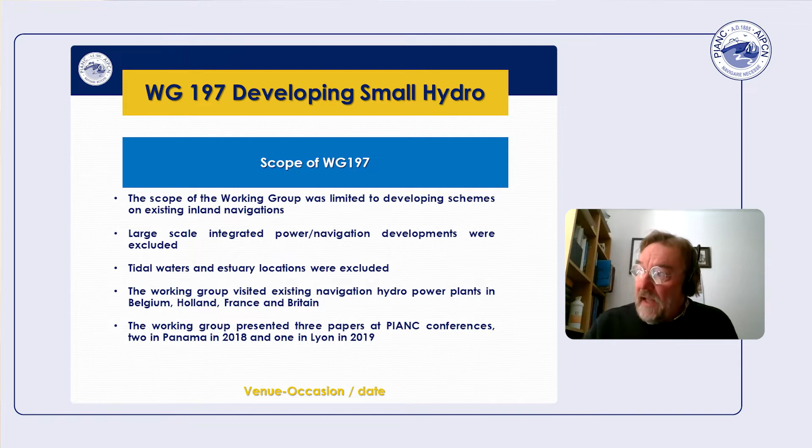The scope of WG197 was fairly tightly drawn in the initial terms of reference. We were limited to developing hydropower on existing navigations. Large-scale schemes were excluded from our work. We were also excluded from tidal waters and estuary waters. During the work of the group, we visited existing navigation hydropower plants in Belgium, Holland, France, and Britain. The working group presented a total of 3 papers: 2 in Panama in 2018 and 1 in Lyon in 2019.

So the program for this webinar today: we're going to have 3 short presentations, which will take about 15 minutes each, from 3 of the members of WG197. We're going to present the highlights of the guide on some of the most important areas, hopefully whetting your appetite to go and read the guide and take some more information from it.

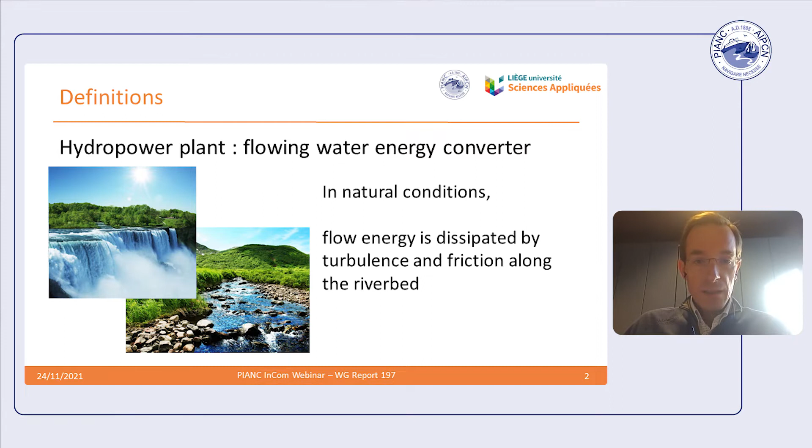And I will speak to you about site identification and energy production potential, as Nick already mentioned. So first, a few definitions. What is a hydropower plant in general? It is a converter of flowing water energy. In natural conditions, flow energy is dissipated in a river through turbulence and friction along the riverbed. In a hydropower plant, we convert this flow energy to something else: first into mechanical energy with a turbine, and then into electricity with a generator.

So if you want to build or set up a hydropower plant, first we need to assess how much energy we can convert from the flow. We need to find a place where we have enough energy to convert.

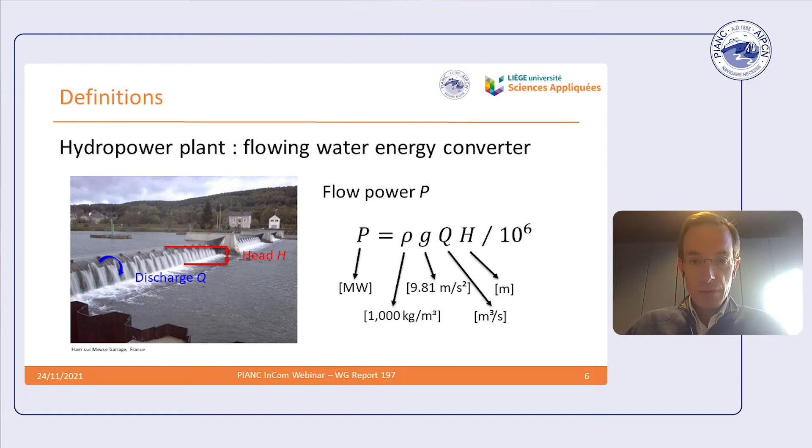So let's have a look at the picture on the screen. What do we need to produce electricity from flow energy? We need a water level difference, what we call a head, H. And we need water going through this head, so we need a discharge. As far as you have a head somewhere and a discharge through this head, you have a flow power, which is dissipated by the flow. This flow power is simply the product of the discharge times the head, and a few constants: water density and gravity acceleration.

And as far as this head and this discharge are available over time, you have energy which is dissipated, and the amount of energy is simply the product of the power times the time the power is available. So for instance, if you have a 10 cubic meter per second discharge somewhere crossing a head of 4 meters, you have a power which is dissipated by the flow of 400 kilowatts. And if your discharge and your head remain constant for 1 hour, for instance, the amount of energy dissipated is 400 kilowatt hours.

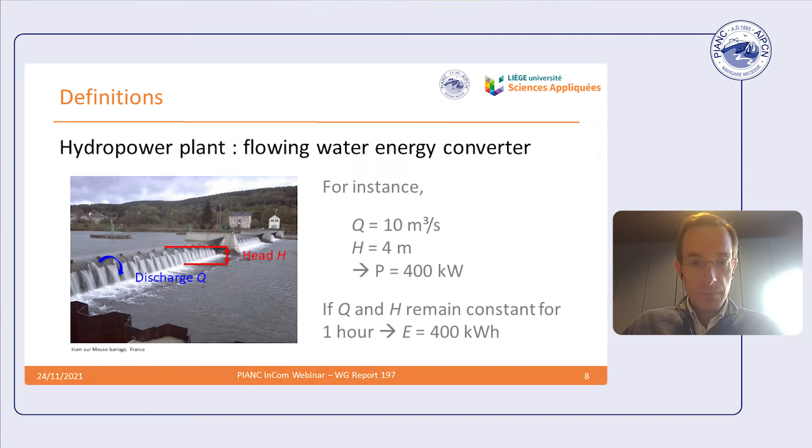With a power plant, you build something to convert flow energy into electricity. Typical schemes today for small hydropower systems have an efficiency around 70 to 90%. So if you have 400 kilowatt hours of flow energy dissipated somewhere, you would be able to recover between 280 and 360 kilowatt hours of electricity with your hydropower plant.

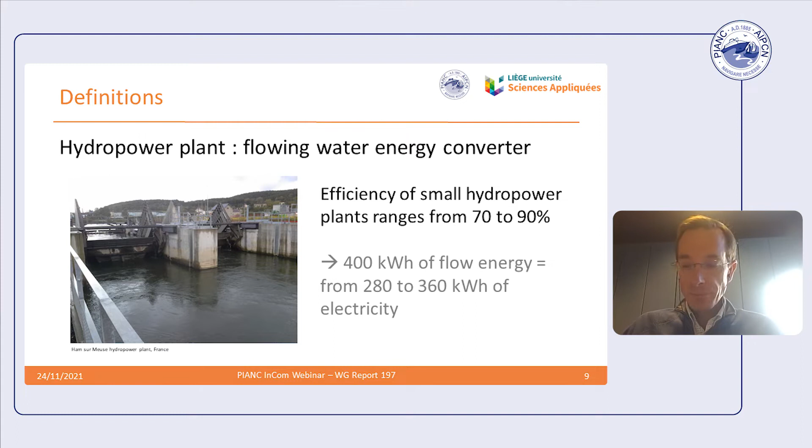After these small definitions, let's start with site identification. We'll come back to our navigable water courses, where we have requirements for minimum water depth to enable navigation. To fulfill these requirements, we usually build locks, creating free surface elevation variations, so we create head in the navigation water course to enable navigation.

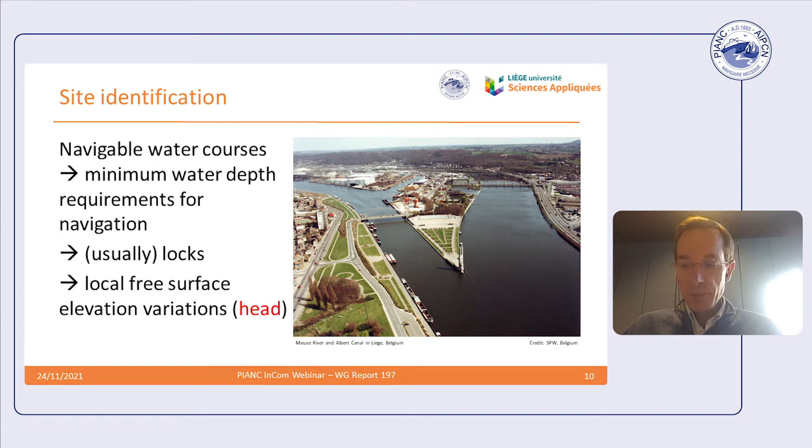In these water courses, we also have discharge, because we need some discharge to operate the locks, to fill the chambers, and also for environmental requirements. Sometimes we have too much discharge available, and this is released using weirs close by the locks. So in some navigable systems, we have both head and discharge available.

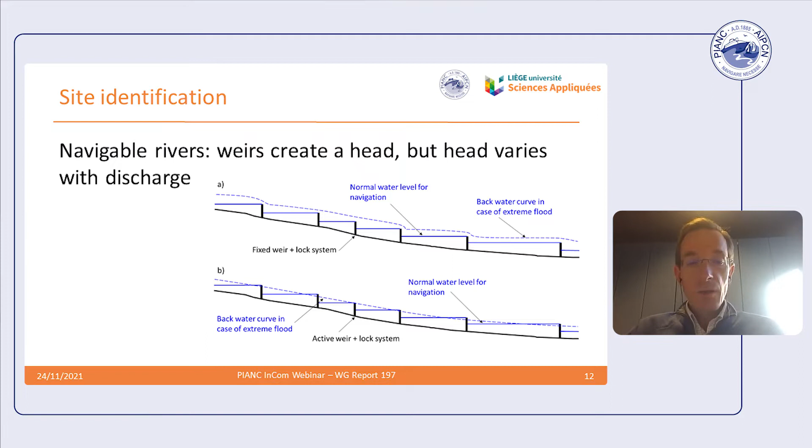We have these heads, water level differences at each weir and lock, at least in normal water level conditions, shown as plain blue lines on the drawings. In case of large discharges, floods, depending on the weir operation and the backwater curve development along the river, the head will vary, and usually will decrease. Anyway, in principle, in navigable rivers, we have this head.

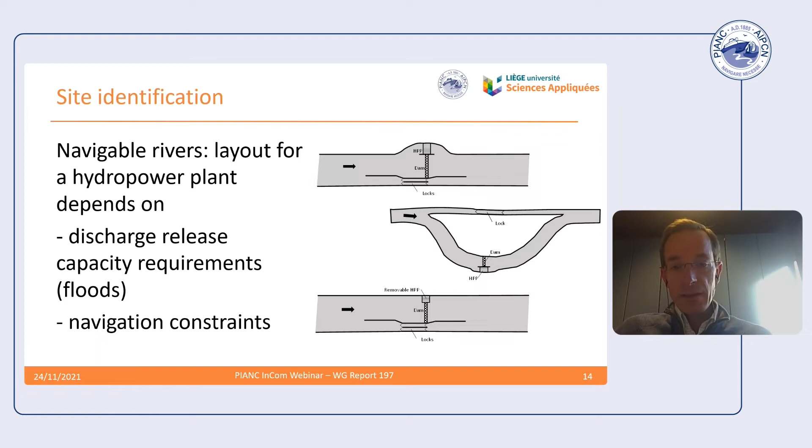So now we have different possibilities to build this hydropower plant on rivers. These arrangements depend on what we need to do with discharge, particularly during floods, and on navigation constraints, particularly regarding velocity in the river close to the locks.

Let's consider a typical layout in a river. The power plant will be built aside the river cross-section, on the bank opposite to the one where you have the locks. This way, you divert most of the discharge and flow velocity to the power plant, leaving less flow velocity at the locks, giving better navigation conditions for ships. This is a typical arrangement of lock plus weir plus hydropower plant on a navigable river.

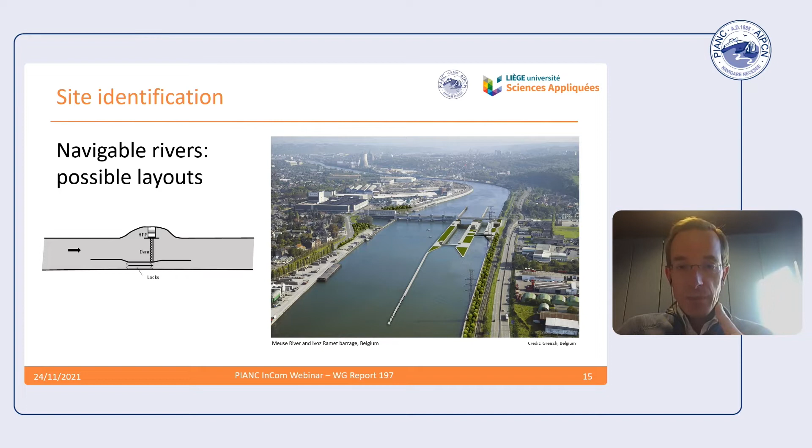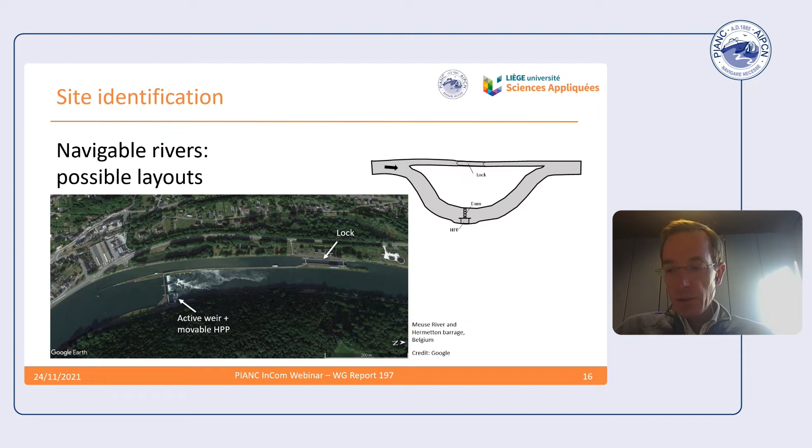Sometimes, if you have several branches in your river, you can dedicate one path to the lock, with low flow velocity since only the discharge needed to operate the lock is used there. All the remaining discharge is diverted to another path where you build the weir to control water level, with the power plant close to the weir, or on the weir if there's no space to divert all the discharge. This is another typical arrangement.

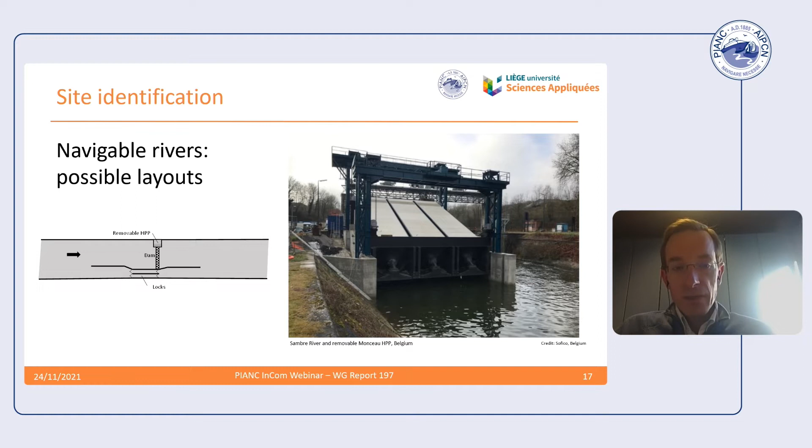The last case: when you don't have a lot of space, and all the space in your riverbed is used by the locks and weir needed to enable navigation, you can still build something to recover energy. In this case, you build the power plant on the weir, and maybe make it movable, to maintain the full discharge capacity of the river cross-section by moving the hydropower plant out of the water, especially when the weir is active and can also be moved during a flood.

Okay, so this was for rivers where we have heads and discharge available. In navigable canals, it's a little bit different. We still have locks, and so we still have creation of heads thanks to these locks. But usually we have no weir, because we have no discharge issue, no flood issue in a canal.

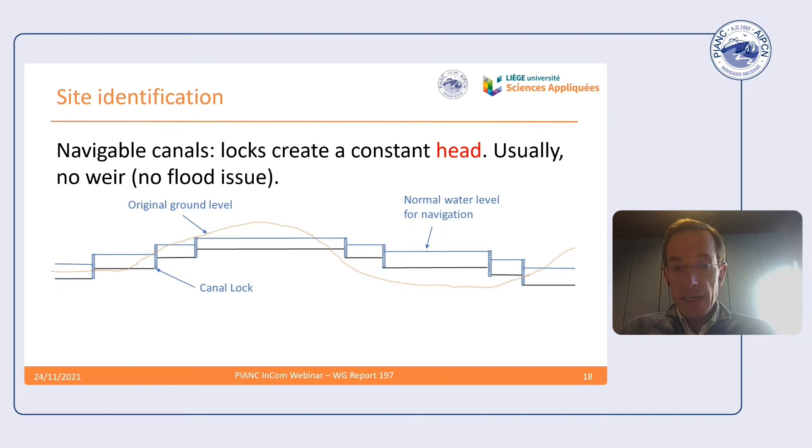In most canals, we don't even have enough water supplying the upper part of the system to operate locks, so sometimes you need to pump water in canals to operate locks. In this case, there's no discharge available for hydropower generation, so no way to build a hydropower plant. But in some specific cases, excess discharge may be available in the canals.

This excess discharge is sometimes available only during certain periods of the year. If you have more discharge than what's needed to operate your locks, you can use that to produce electricity with a hydropower plant.

If we look at the drawings here, it shows that depending on the discharge which can be diverted to your canal, if you have more than what's necessary to operate the locks—and it's not only a question of instantaneous discharge, it's a question of volume of water available—if you have more water entering your system than needed for the locks, you can use part of this discharge to produce electricity.

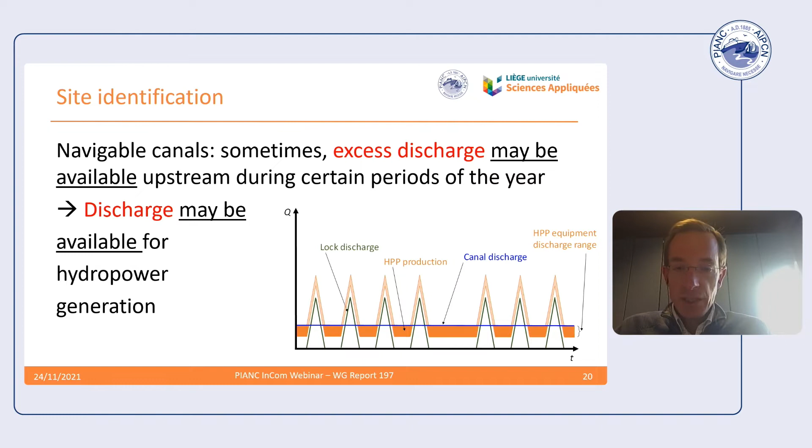Another way to look at this energy production potential, instead of looking at instantaneous discharges and heads, is to look at what we call a flow duration curve.

This is another way to look at the discharge available in a river. In such a graph, you build a curve which shows how much discharge is available over time in your system. For instance, you can see 100% of the time very low discharge is always available, and the higher the discharge, the shorter the time it is available in your river or canal.

From such a curve, it's very easy to see what is needed for environmental constraints, or what environmental flow is always needed. What discharge do I need to operate my locks, so what is needed for navigation? And what is the remaining discharge available over a long time in my river to produce energy?

So I can start to decide what to build as a hydropower plant—in particular, will I build something to use a small discharge during a very long period? So a power plant with low output, low power, but a high load factor, operating during long periods to produce a small amount of electricity.

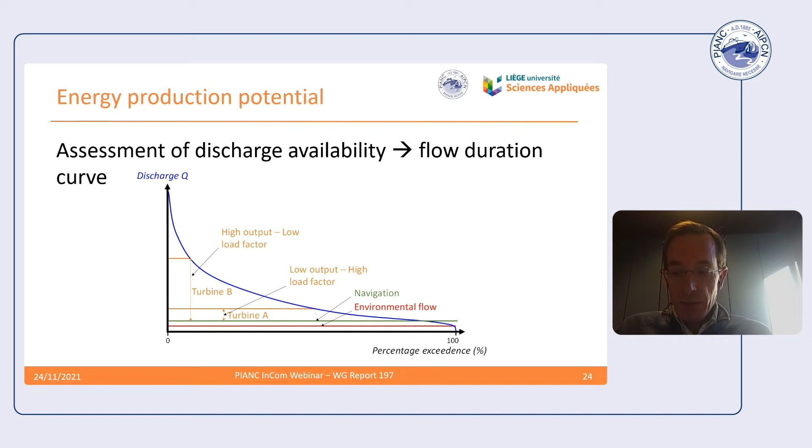We should not forget that we also need a head to create electricity from hydropower. So we also have to look at head variations, in particular in navigable rivers during floods. When the weirs, if active, are opened, the water level difference from upstream to downstream decreases.

This can also be assessed with something like a flow duration curve—a level duration curve, which shows for each discharge what the head is, what the upstream level is, what the downstream level is, and so what the remaining head is in your system. In particular, the higher the discharge, usually the smaller the water level difference available to recover energy.

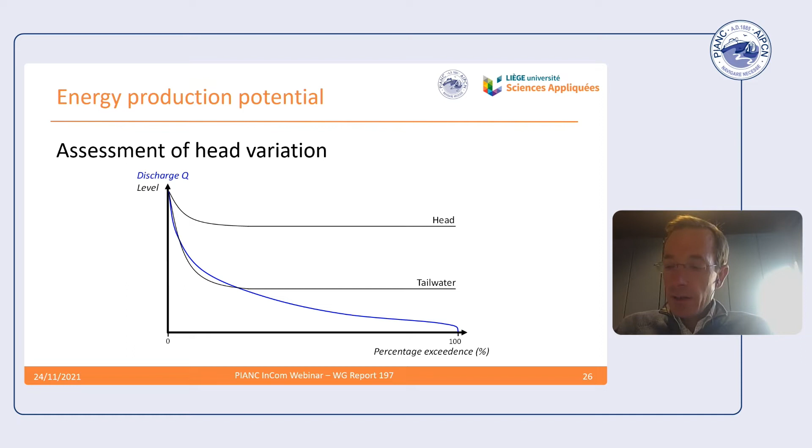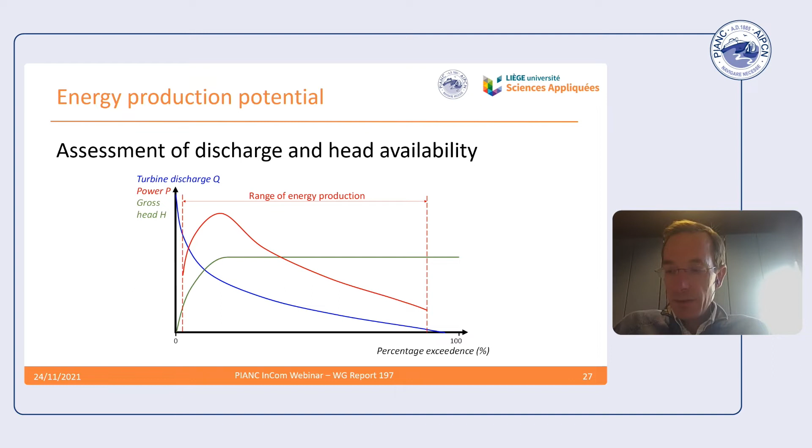The next presentation, we're going to look at the turbine technology typically employed on navigations where we install small hydropower. One of the most important things the working group did was set the limits on the ranges of head and flows we should consider. Hydropower has a huge potential range of head, flow, and power outputs, so it was very important to limit it to specific technologies and specific sizes we're likely to encounter.

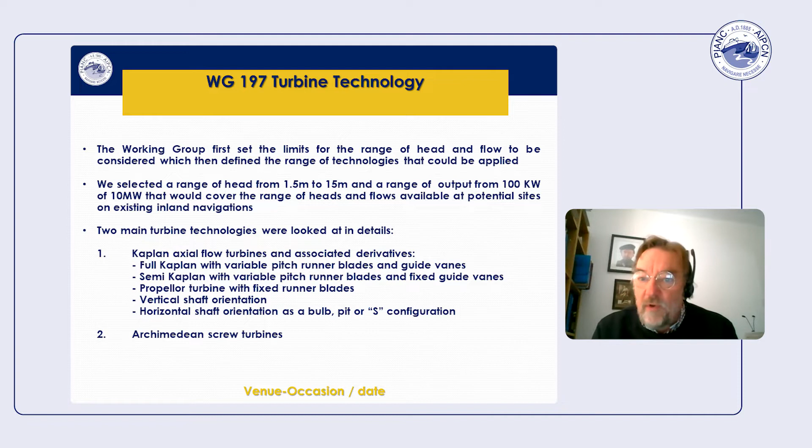In doing that, we realized the likely range of head was from 1.5 meters to 15 meters, and a range of turbine outputs from 100 kilowatts to 10 megawatts. This covers pretty much everything we were likely to come across at potential sites on existing inland navigations. These figures are quite small compared to some schemes like the River Rhone in France, the Danube, or the big rivers in America, but those are a different scale of development. We were looking at retrofitting power plants to existing navigations.

The two main turbine technologies that come out of that limited range are Kaplan turbines. Kaplan turbines are pretty much like a propeller, in that they're axial flow machines, but they tend to have variable pitch runner blades and guide vanes, giving them a very wide range of efficiency. There are variants on the Kaplan: a semi-Kaplan, which has variable pitch runner blades and fixed guide vanes, and a propeller, which has fixed runner blades and fixed guide vanes. The propeller turbine has a much less wide range of high efficiency.

We can arrange these turbines with a vertical shaft or a horizontal shaft. In larger sizes they tend to have a vertical shaft orientation, while in horizontal shaft orientation they tend to be smaller, typically known as a bulb, a pit, or an S configuration. The second type of turbine that has come to prominence in navigation developments is the Archimedean screw turbine. The next slide gives you an idea of the range of applicability of these turbines.

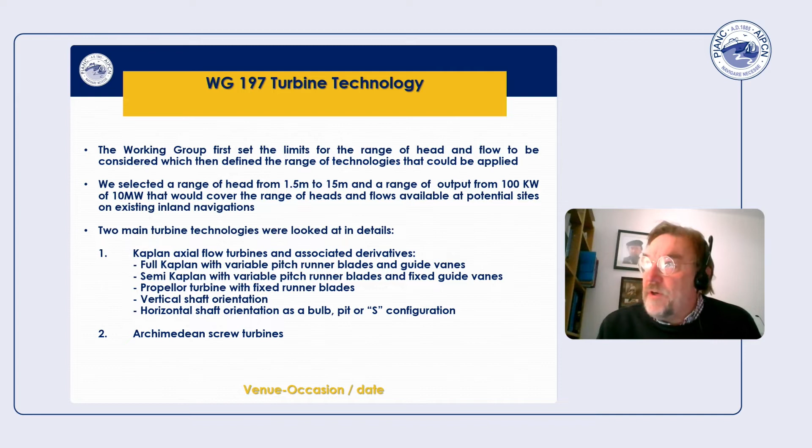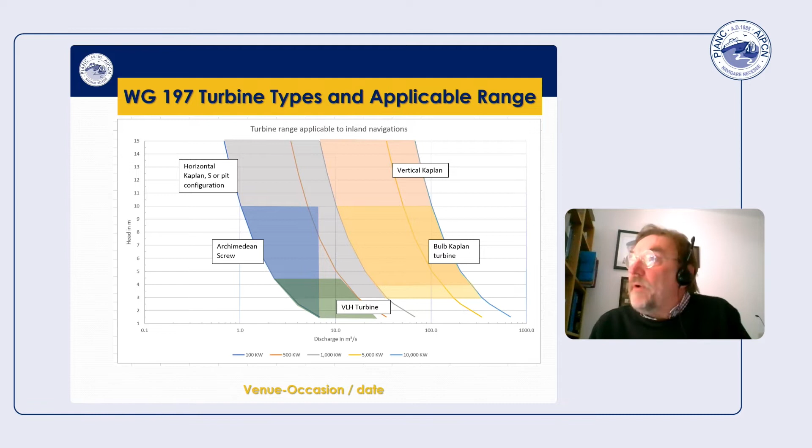Let's now have a quick look at some pictures of these, to give you an idea what they look like. The first one is the VLH turbine, developed specifically for low head applications. Normally you wouldn't look much below 3 meters in conventional hydropower because the head is quite low and it's difficult to extract energy efficiently. But this turbine was designed specifically for such applications, making use of all the modern technologies available now. Its range is 1.5 to 4.5 meters, which covers a lot of locks on navigable rivers.

One of the main criteria for designing this turbine was to make it fish-friendly, so that fish can pass through the turbine without injury. And that makes your trash screens upstream and downstream much more simple to deal with, which is what the next presentation will cover.

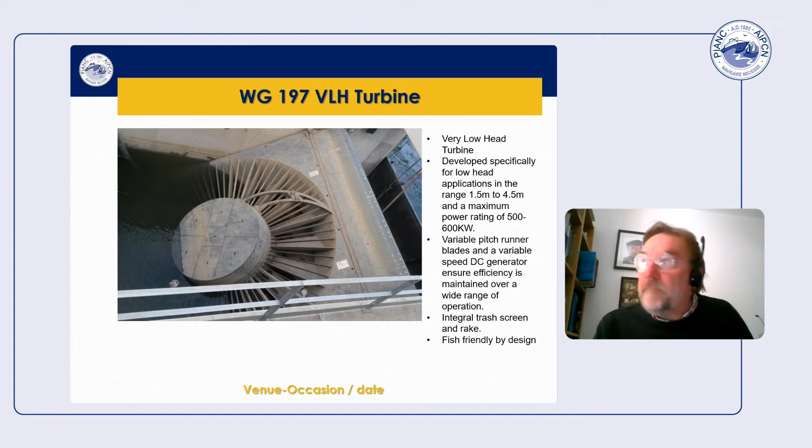So if we just go on and have a quick look at what that looks like in a configuration. There you go.

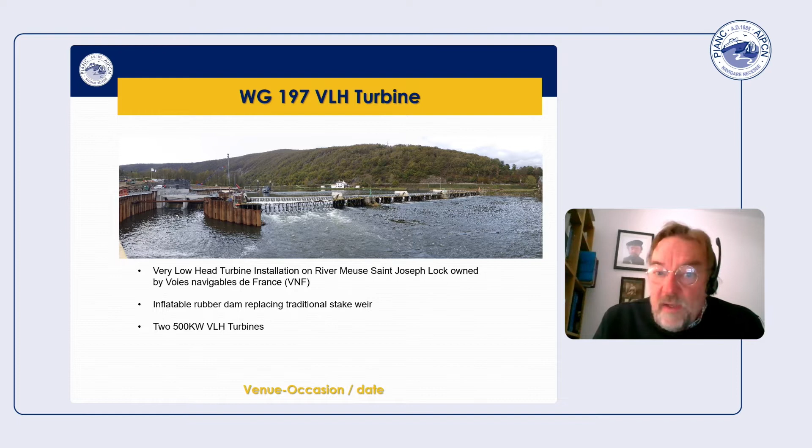This is an installation on VNF in the River Meuse, at Saint-Joseph Lock. In this project, the existing stake weir was replaced by a rubber inflatable weir, and on the left side of the picture, two 500 kilowatt VLH turbines were installed in this overall development. So this combines an active weir with the turbines, and I'll talk a little bit about that later.

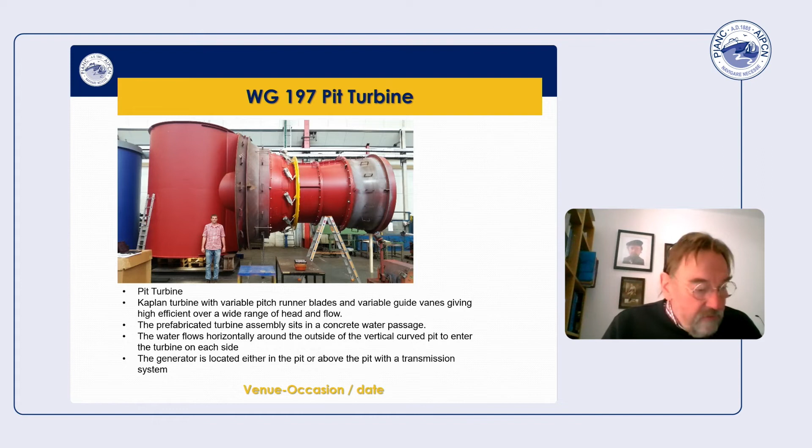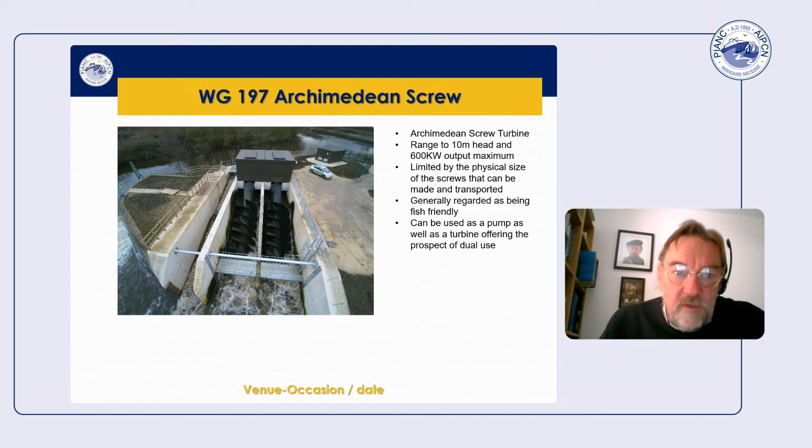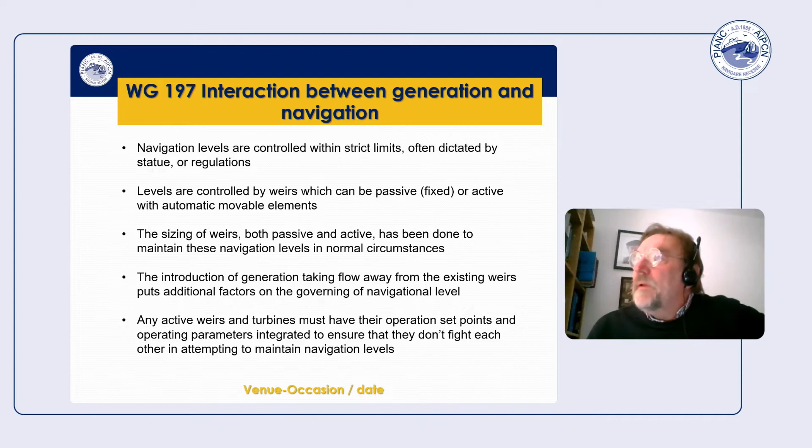We now move on to the next slide, if it's coming. Yeah, there we are. So when you've decided how much water you want to take through your turbine, the crucial thing to think about is the startup and shutdown of the turbine.

There are two approaches that you can take. If you limit the flow through the turbine, such that changes don't affect the navigation level, the amount of water you take out of the river to put through the turbines is relatively small as a proportion. So when the flow changes through the turbines, it won't affect the navigation very much.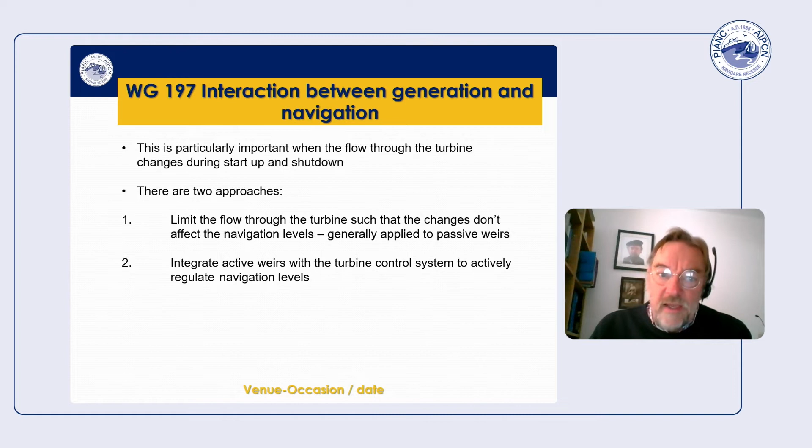Or the second alternative is you integrate the active weir and the turbine control system. This obviously allows you to take more water out of the river and therefore generate more power.

The two changes you have with a turbine are a startup, a change of load, and a normal shutdown. These can all be controlled by the turbine control system, and you can change these at such a slow rate that the sudden changes of flow don't lead to navigation level excursions.

The biggest problem is the fact that a turbine, being an electrical generator connected to the grid, can be shut down immediately and quickly by things beyond the control of that particular generating installation. In that case, you can get a large excursion of level.

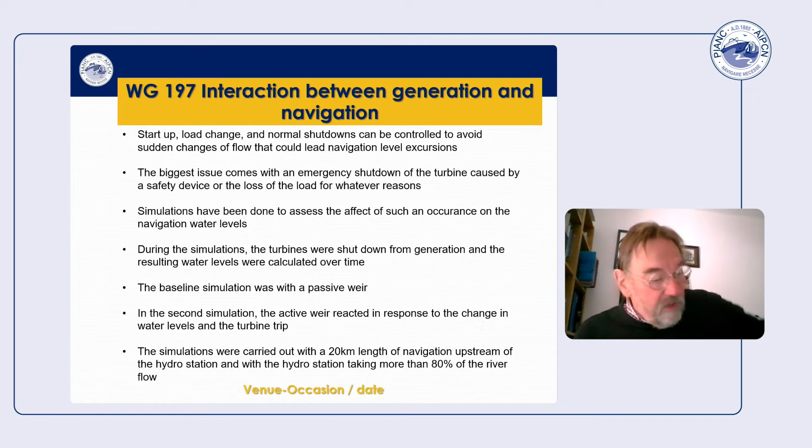So what you need to do is simulations to show how the levels vary. This next couple of slides show some simulations. The first one is with a passive weir on a 20-kilometer reach of river, where the turbine was taking 80% of the flow. The graph shows how the water level upstream varies over time, with time on the bottom in hours.

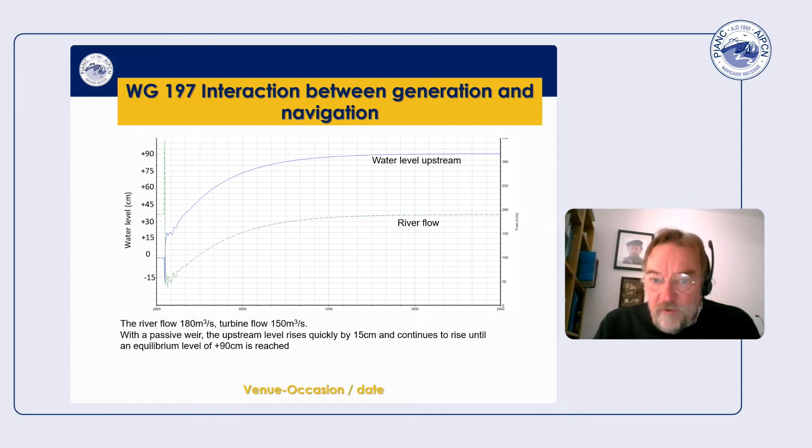Over a 24-hour period, the level rises, because it's controlled by a passive weir, potentially by 75 centimeters, or almost 90 centimeters, which may well take you outside the bounds of your controlling river levels. And the river flow also takes a long time to recover back to where it was.

If we look at what happens with an active weir with exactly the same parameters, you can see that the operation of the active weir can bring the water levels upstream and downstream and the river flow back to where they were before the operation of the power plant stopped, within a much shorter space of time.

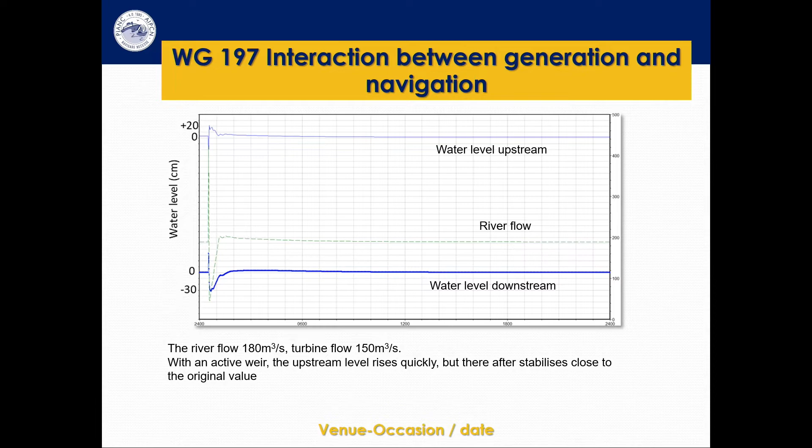So if you want to take a lot of water out of the river to generate more energy, you're going to have to put in some active control of the water level. You can't just rely on a passive weir.

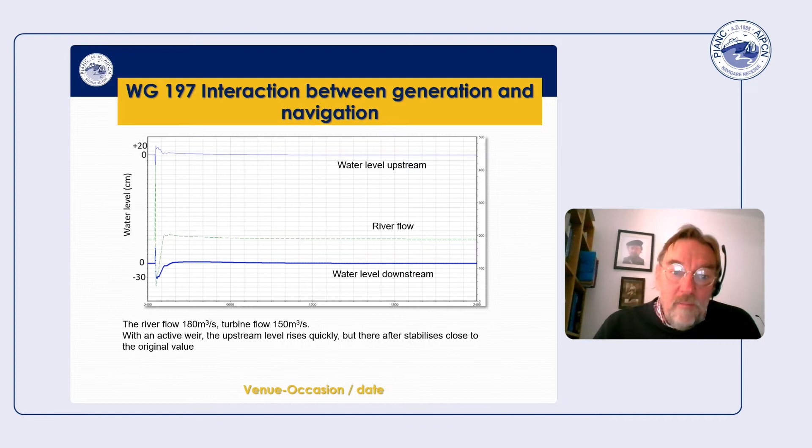Finally, one last slide is a picture of what can happen to the flow over a passive weir, with a power plant before and after picture on the left and right. The power plant was constructed, and even though it doesn't take a large proportion of the flow, it's still altering the way the water flows over the weir and what happens downstream of the weir.

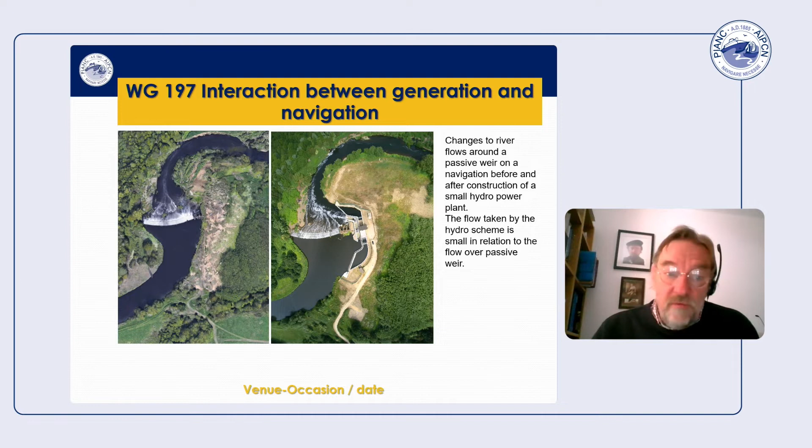Now, all of this can be modeled and looked at, and physical models and numerical models can be made to see how the introduction of a turbine can affect the navigation.

I do have one final slide with a few conclusions. So there are several types of turbines: the VLH turbine, the Archimedean screw, and the small horizontal shaft Kaplans and derivatives.

The presence of small hydro can affect the maintenance of navigation levels. This effect can be mitigated by reducing the proportion of water available or introducing an active weir. Hydro schemes, even at low proportions of total flow, can change the direction of flows with effects on sediment dispersal, erosion, and water velocities.

So that shows you how we've gone from deciding how much power is available to what type of technology you might use to extract that power from the river, and other areas you might need to consider when developing a small hydro scheme on your navigation.

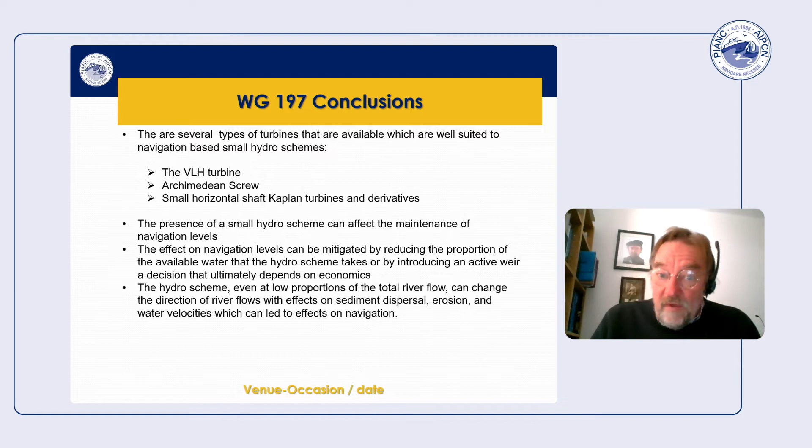I'm a director of ANF Consulting, who specialise in the design of low-head hydropower and, in addition, fish passage. I've been asked to present a brief paper on the subject of fish passage and trash racks or intake screens, and how they are incorporated into hydropower schemes.

Now, the introduction of any physical structure into a watercourse, whether that be a river or a canal, introduces an obstruction to the natural movement of water, and by that, anything that may also be in that water.

Such objects can be natural, such as the variety of fish species which colonise watercourses or maybe just use them for the purposes of migration, or it can be debris carried along the watercourse, having inadvertently found its way in there. A well-designed hydropower installation will seek to minimise the impact of the installation on the natural movement of both.

But by its very nature, hydropower plants often take large volumes of water, and they can naturally attract both fish and debris, causing problems for the operator of the hydro plant, and also, in the case of fish, for the fish themselves. To minimise this impact, hydropower plants are designed to incorporate both trash screens and fish passage measures so the plant can operate effectively without being impacted by debris, or impacting upon the fish within the watercourse itself.

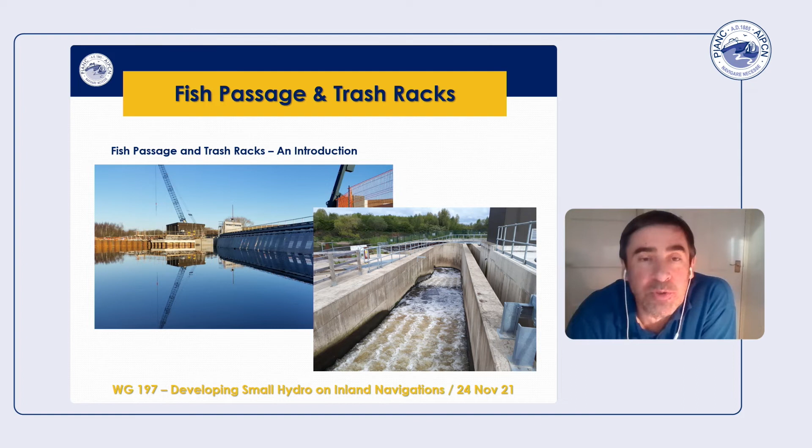These measures are what we term trash racks, or sometimes called intake screens, and fish passes.

Now, the need to protect the turbine seems initially to be the most important one. After all, they are the heart of any hydropower plant, and they are expensive items. However, whether they actually need protecting from normal debris depends partly upon the type of turbine used.

As Nick mentioned, Kaplan turbines are often used, and these have rotating runners comprising 3 or sometimes 4 blades and spin at relatively high rotations, so impacting debris can cause damage, and protective screens make sense. Archimedean screws, though, rotate at much slower rates and have large pockets of water which pass along them, so these screws can transport large objects down them without damage to either the screw or the objects themselves. So whilst very large objects, such as trees or boats, shouldn't be allowed to pass down them, an overly fine intake screen can actually cause potential blockage issues, whilst trying to protect a screw from impact from debris which wouldn't actually cause a problem to the screw.

So consequently for screw installations, we find wide-spaced bar screens are often used to minimise blockages that exclude only very large objects.

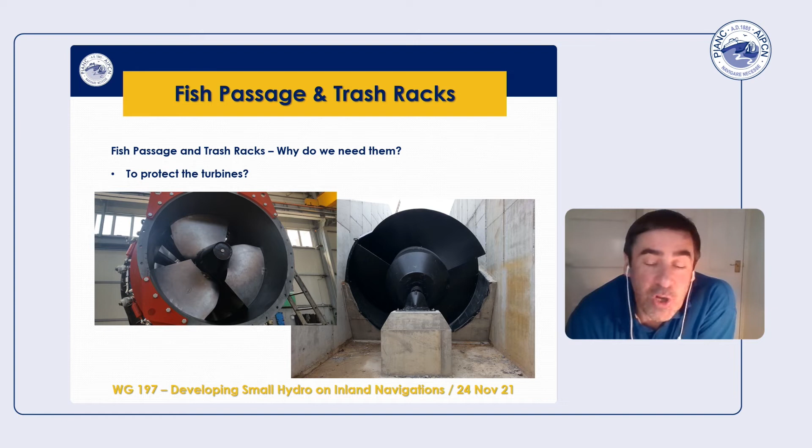Now, trash screens, or more correctly, intake and outlet screens, are often required to keep fish out. And again, just which type of turbine is installed will determine the type and nature of the screen which is used. Some are to deter deliberate entry of fish, and others are to deter unintentional entry.

Salmon and sea trout are well known for their desire to move upstream during migration periods, and in doing so, they naturally follow the direction of flow within a watercourse. This causes them to move towards hydropower plants when approaching from downstream, as this is where most of the water is often coming from.

Whilst no one has suggested that a mature salmon would inadvertently swim into a rotating turbine, the confusion that this blocked passage can cause the fish can create delay and wasted energy, which can reduce the chances of any one fish making it upstream to suitable breeding grounds and successfully breeding. Consequently, outlet screens are often required to prevent this wasted journey simply to visit a rotating turbine.

Eels also migrate upstream, but given that they do so as juveniles, they are often much smaller and much less able to swim against strong currents than their salmonid counterparts. Eels would not normally choose to swim up to a turbine, as the flow coming from it would be too strong.

However, once they are past the weir or other obstructions such as a lock, they can come into close contact with the intake to a turbine, which, if not guarded, can pull them back into the turbine with the certainty of them ending up downstream of the weir, if not mortally wounded by their journey en route.

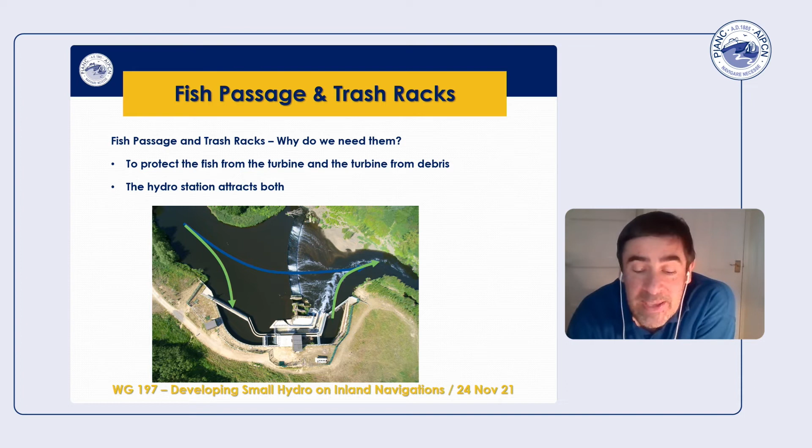In the case shown above, the original flow pattern follows the blue arrow, but once the hydropower is built, the flow changes to the green arrows. And the debris, and in many cases the fish, follow this same change in flow path.

It's important to remember that in the case of fish, movements can be in either direction, depending on the type of fish and the stage in that species' life cycle. All movements, however, are guided by the flow pattern within the river.

It's only by understanding the behaviour of both fish and debris that as hydropower designers, we can design hydropower plants to ensure that fish are not delayed by confusion or blind alleys, and also that debris is kept away from the turbine and moved away by whatever means is mandated by local licensing authorities.

Debris screens, trash screens and fish passages are interrelated and not separate elements of hydropower design. By correctly designing intakes and outlet screens, it is possible not only to deflect debris floating in a river, but also to change the behaviour of fish.

By placing such screens at an angle to the flow, both upstream and downstream migrators can be guided along the screen using the flow to attract them, so that at the end of the screen is the fish passage, which will attract them and lead them safely past the hydropower plant.

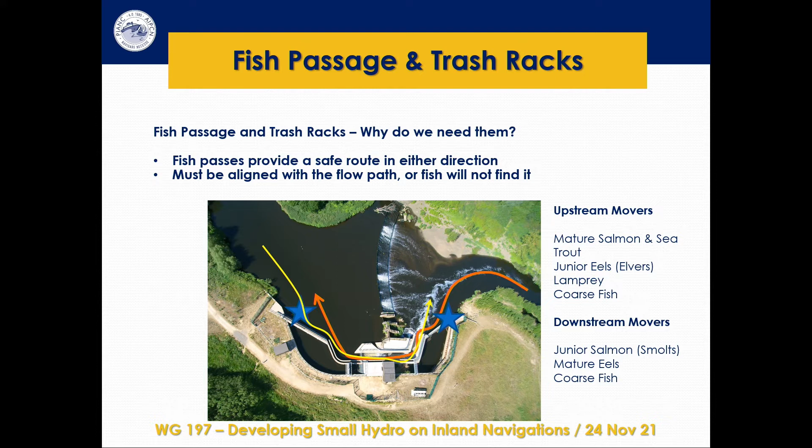In the case shown, the yellow and orange arrows show the preferred routes for both upstream and downstream migrating fish, aligned with the upstream and downstream ends of the respective trash screens. Without such guidance, and at worst if fish encounter a barrier perpendicular to their travel, they would end up confused and delayed trying to find a route past the obstruction. For all migrating fish, time is of the essence, so any fish passage must be designed so that fish will find it quickly and pass without undue delay.

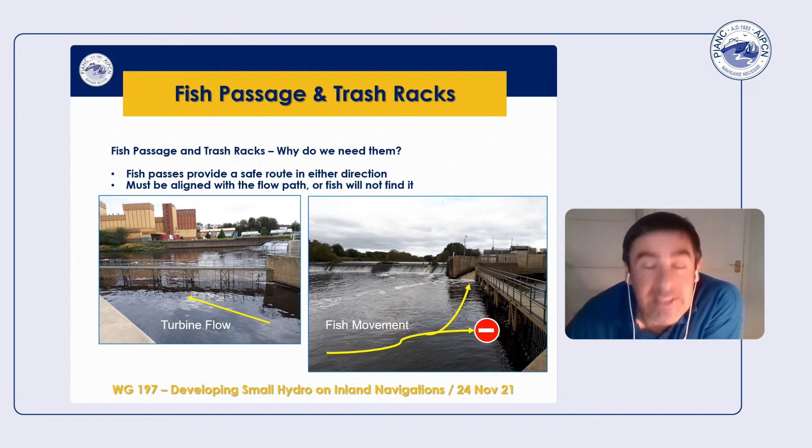Here's an example of how a downstream exclusion screen prevents upstream migrating fish from entering the turbine tail race, as the route is naturally blocked by the screen. But the natural movement of flow coming from the screen and from fish passage measures upstream naturally attracts the fish along the screen until eventually they locate the fish passage measures, which is their safe and speedy route past the hydroplant. As hydroplant designers, this is the scenario we try to create to prevent this delay that migratory fish may experience.

Fish passage is not a one-solution-fits-all scheme. Different rivers have different fish populations, both resident and migratory species, and these have different movement behaviours. This even applies to fish not regarded as migratory, as even resident fish are known to move up and down a river at different times of year for reasons including different feeding areas, different breeding areas, and sometimes to avoid areas that have become overpopulated.

Designing fish passage is therefore particularly sensitive to the location of the hydropower plant, and in the case of eels, particularly its proximity to the sea or the tidal limit of the river. In the UK, with its relatively short rivers, eels are generally considered as elvers for hydropower design, up to around 100 millimetres in length, whereas in continental rivers, often many hundreds of miles from the sea, they will be far larger, based on the principle that eels migrate upstream rather slowly over several years, growing from small glass eels entering the river system to more mature eels living further upriver.

Intake screens therefore tend to have apertures determined by the size of eels rather than fish. The size of the eel depends on how far away from the tidal limit the screen actually is, and this can result in screens varying between 3 and 30 millimetres of aperture. So whilst other fish often are present and need protecting, they are often larger than the eels, so it is the eels that actually determine the size of the screen.

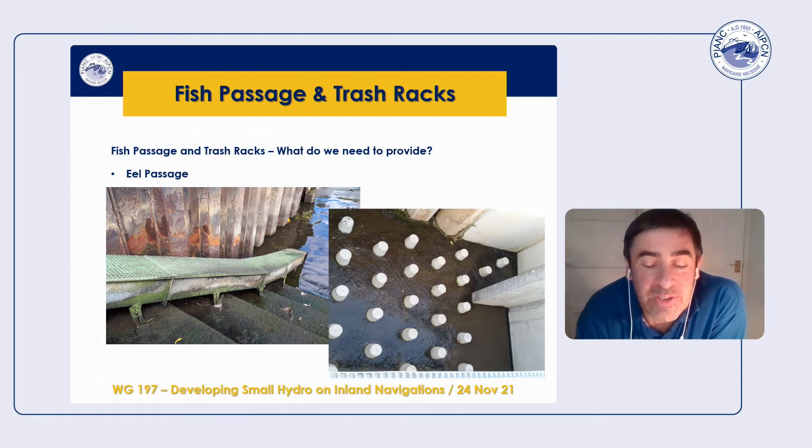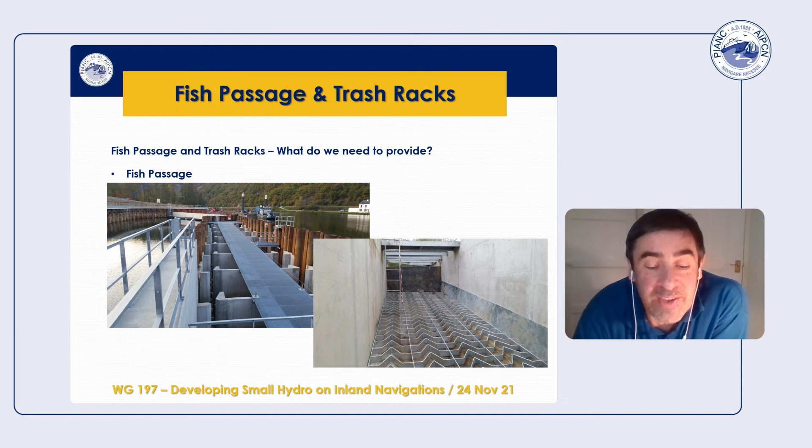Fish passage is similarly designed for the predominant or target fish species, and this choice is often constrained by the preference of regulatory authorities in each country. In the UK, there's a strong preference for Larinier type fish passes due to their multi-species suitability and low blockage, self-cleansing characteristics. But in other countries, designs such as vertical slot fish passes are preferred. Once again, there is no one-stop shop for fish passage—each must be tailored to the suitability of the site, the river, and the target fish species.

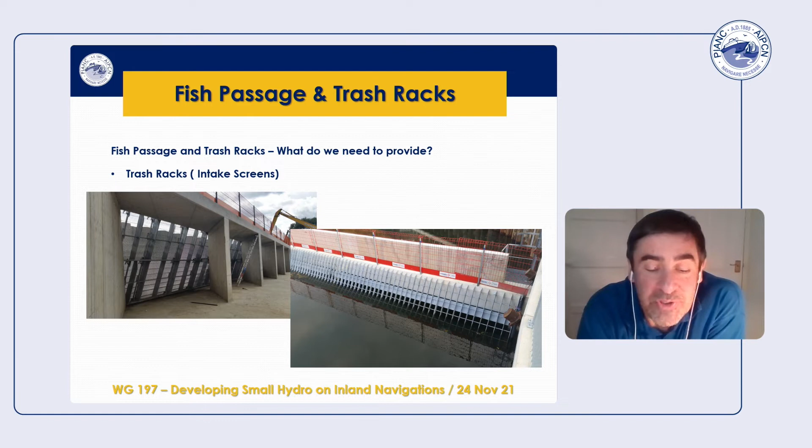As mentioned earlier, intake screens or trash racks are determined by both the need to protect the turbine and to protect the fish. This leads to a large variety of different screens that may be required, and with that, the means of dealing with the trash or debris which may collect on the screen. Very fine screens, such as those found on Kaplan turbines in the UK, can be as small as 3 millimetres, designed to protect eels. But on larger rivers, they could be 25 to 100 millimetre apertures, where protection is primarily for the turbine rather than the fish.

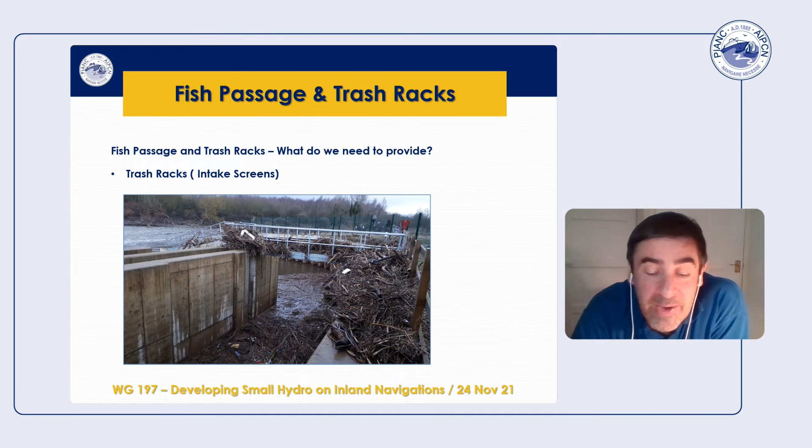All river-based hydropower plants face substantial volumes of debris during flood events, and any trash rack or intake screen, irrespective of its aperture, will block during such events. During very high flows, preventing damage to the turbine and associated equipment is paramount. But at less intense flow events, maintaining generation is key—keeping the screen clear of debris so water can reach the turbine. This usually requires the deployment of an automated screen cleaning system.

In some installations, an inclined screen isn't possible, and a perpendicular screen is installed, such as the one shown. These screens will collect significant accumulations of debris during a high flow river event, requiring mechanized equipment to remove it due to the physical size and volume collected. Failing to remove such debris will restrict power generation at best, but may jeopardize the structural integrity of the screen at worst. The debris collected this way often has to be disposed of by the operator of the power plant, usually at their own expense.

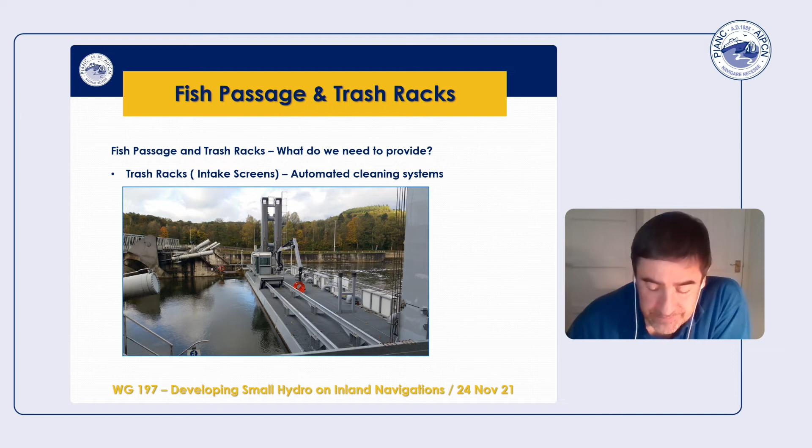Alternatively, some screens can be inclined to the flow—sometimes referred to as side offtakes. These are often able to deflect the debris downstream, and where permitted, automated cleaning systems can, when combined with horizontally inclined screens, be designed to push debris downstream on a screen without actually removing it from the river. This avoids the cost of disposal by the operator of the hydro plant.

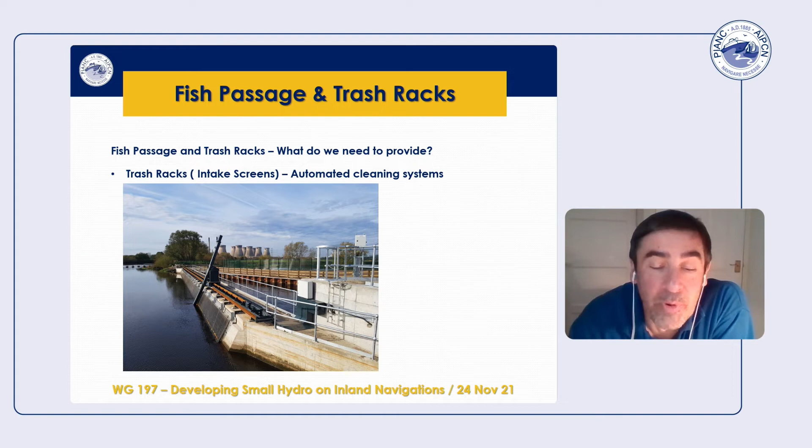So fish passage and trash racks are not supplementary items bolted alongside a hydropower plant, but part of the whole. When designed correctly, they help ensure that the turbines are operated efficiently, safely, and without risk from impact damage. They also ensure that the aquatic life within the river, on which the power plant depends, can move as freely as possible and not be adversely impacted by the renewable energy generation plant.

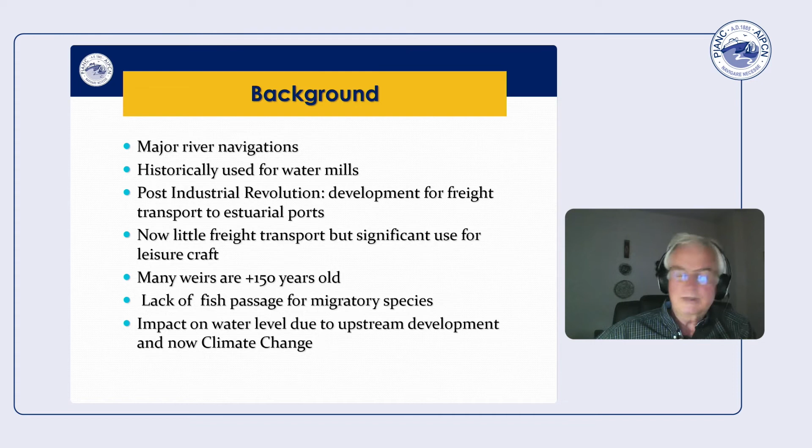Within the UK, there's been no national or regional plan for low-head hydropower generation. All that has been done has been of a retrospective nature, constructing hydro plants alongside existing weirs. We have not had a programme with economic drivers such as the Tennessee Valley or the Rhone to develop hydro plants, so they have never been an integrated part of our navigational structure.

The UK traditionally has relied on using coal-fired power stations. This is mainly the result of us having a nationalised coal industry and thus government policy. Until relatively recently, in the last 20 years, there has been no incentive to change from coal to other sources.

But obviously, with the interest in green energy, with climate change, with all of that we've seen being discussed in the last couple of weeks with COP26, there's been a worldwide move to looking at green energy. Certainly it's been the UK government's policy to support such initiatives, primarily with the feed-in tariff. This is a subsidy paid to owners and operators of green energy plants, whether it's solar panels, solar farms, wind turbines, and hydro plants as well.

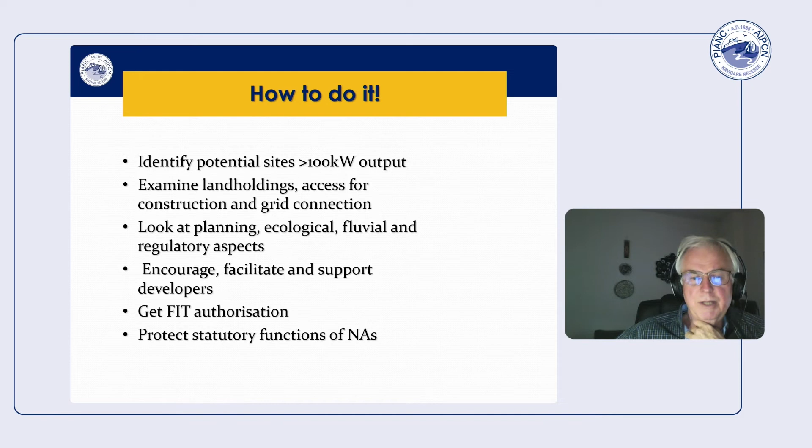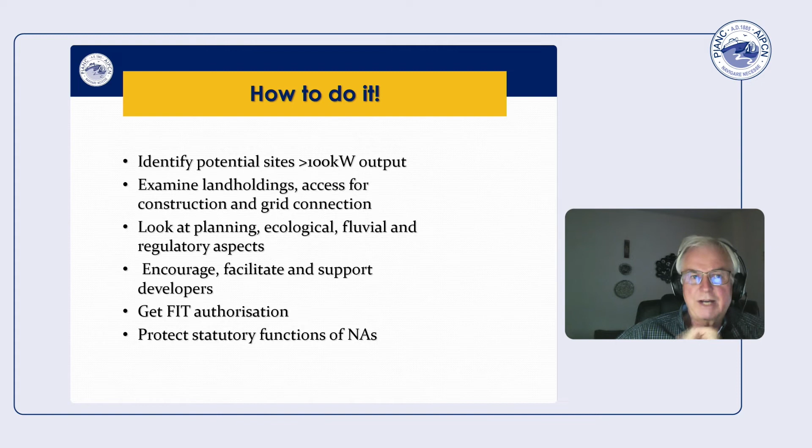But there are now other purchasing guarantees coming in that give confidence to investors that they will see a return on their investment into the sites. We also have to see, and this has been part of my role when I've been working for the Canal and River Trust within England, and it was mentioned by Nick, you have got to protect the statutory function of the Navigation Authority by ensuring that at low flows, there is enough water left in the navigable channel for the safe passage of craft.

So what to do? Well, there are physical surveys, both of the land and of the channel. And the channel is particularly critical. It has to be done, obviously, in 3D, a full bathymetric study to understand the implications of what can happen as you change the flow within the river, and as Austin demonstrated with his aerial photographs of how the bed can move from one side to the other.

We have to look at the fishery implications. Is the riverbed going to change from, say, nice clean gravel to heavily contaminated silt that will stop spawning? As a result, do you get this form of pollution? Is there a risk of sedimentation? And are you actually making whatever migratory fish passage already exists even worse?

You have to do a navigational risk assessment to examine the channel velocities, whether there's going to be an ongoing dredging program because of downstream sedimentation. Could there be scour damage, which would cause collapse of the navigational structures? Sedimentation, are we going to see shoals building up across the outlet from the locks?

And also about the public access, and that's public access in terms of people on the river and boating, people doing wild water swimming and the such like. Are they protected from the operation of the hydro plant? And even in terms of land-based access into it, that has to be carefully considered as well.

So what about the future? Well, there are more sites to be developed. Some are in the pipeline and looking for funding. The question I would ask is, will these be financially viable compared to wind and solar generation? Are there green government subsidies available?

Well, not so much subsidies now, but there does seem to be a move towards guarantees for the sale of electricity. I think one of the key things I've recognised over the years is the economies of scale, in that unfortunately there isn't such an economy with low-head hydro plants, as they are all unique and not capable of mass production compared to, say, solar panels or wind turbines.

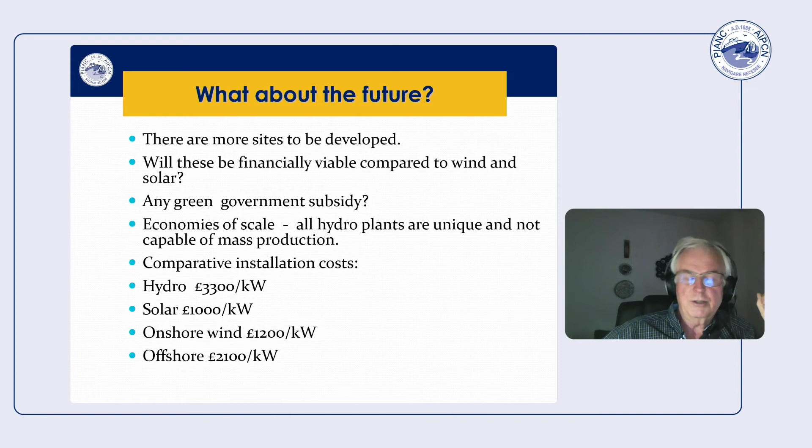I also think there is an issue about comparative installation costs, such as hydro at about £3,300 per kilowatt, solar at 1,000, onshore wind at 1,200, offshore at 2,100. So there is an extra overcost in going the hydro plant route, but not to say it can't be done.

So has it been a success? Well, certainly on the Canal and River Trust, there are 10 plants up and running with a mix of turbines and screws. Are they exporting electricity on a regular basis? Yes, they are. We're seeing increased biodiversity in that migratory fish are now returning because the fish passes have been installed as part and parcel of the hydro plant development.

And I have to say, from a navigation authority's perspective, that is a significant financial benefit, as they are getting a fish pass for free. And I believe the investors are seeing a return on their investment in that the plants are being traded, they are being bought and sold. And that would not be happening if they were not showing a return.

So to answer the question, who did win, navigation or hydro? Well, the navigation authorities benefited with income, biodiversity, less investment needed for fish passes, better control of water levels, and developed green credentials. The developers have generated both electricity and profits, and society gets green energy and increased biodiversity, so an improving environment. So I would suggest, to answer who did win, navigation or hydro, we all did. It was a win-win-win for all.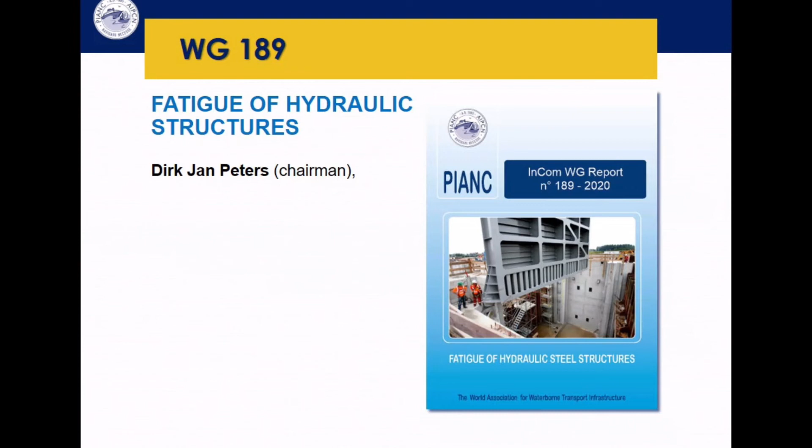So first, there was a working group on fatigue of hydraulic structures. It was led by Dirk from the Netherlands. It's a technical report on the fatigue which occurs in any steel structure, but we wanted to go here to the specificity of the hydraulic structure. And for example, I know that was a major problem for the Panama lock gates, the design considering the fatigue assessments.

Another working group on, I would say, advanced technology, at least for hydraulic structures, is the use of composite materials for hydraulic structure. That working group will also present webinars in a few days. So please welcome to attend that presentation too.

Another one with also a webinar, I think it's the 10th of December this year. It's about saltwater intrusion in the waterways. It was led by Tom from the Netherlands. So welcome for you if you have any interest in that topic to join the webinars.

Now, a few words about some current working groups. They've started. I would say I will present you 4 or 5 working groups. I would say it's not too late to join. Of course, it's time to join because they are running.

So one is on the very important issue of the decarbonization of the inland waterway, and especially with regard to the infrastructure. That's one working group, which was led by Mark from TU Delft, but with the support of the CCNR and Pauli.

Gernot, sorry. The other one is the sustainable management of the navigability of free flow rivers. So of course, PIANC is basically interested in any type of waterway, not only canalized rivers, as we have most of the time in Europe, but also completely free flow rivers, typically what we have in South America.

Another working group that has been launched, you see the date of launching - the first one was April, and the last one just a few months ago - is about the bottleneck and best practice of transportation of containers on inland waterway. So it's more a technical economic working group.

Then just launched yesterday, 23rd of November, handling accidents and calamities in navigation of hydraulic structures. So countries like France, Germany, Belgium, Netherlands - this summer we had, I would say, calamities. So how can we manage that? That is a working group where we'll present some recommendations about that issue. So welcome if you are interested to join.